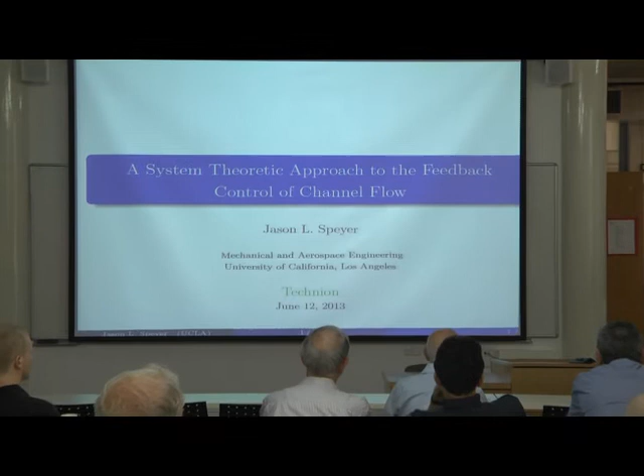So let me, with the few minutes that I have left, talk about a system theoretic approach to the control of channel flow. This is work that I did, a lot of it with John Kim, who's at UCLA, and others also at UCLA, including Arthur Orr and Luca Cortelezzi and Sun Kang, among others that have been involved with this over the years.

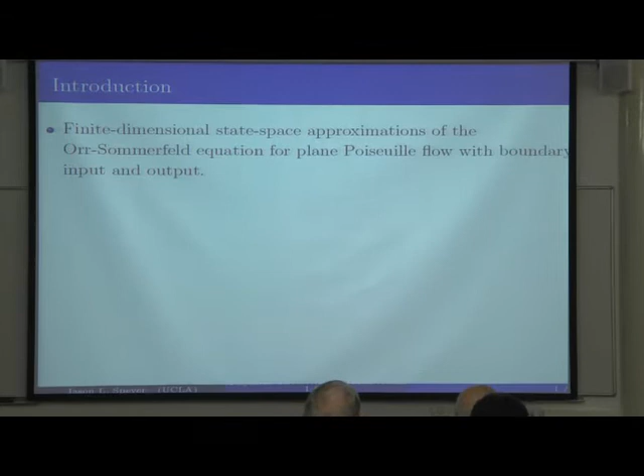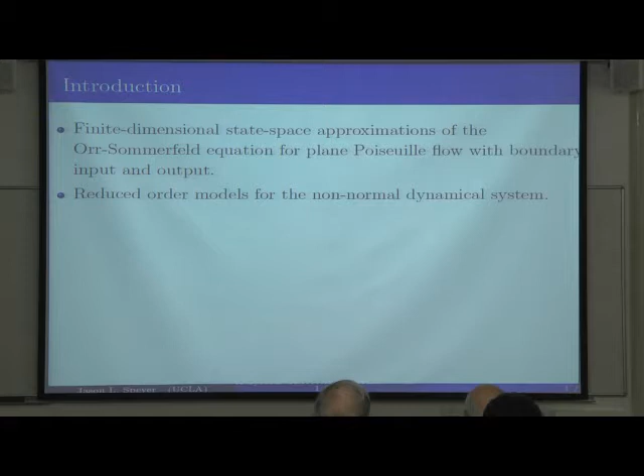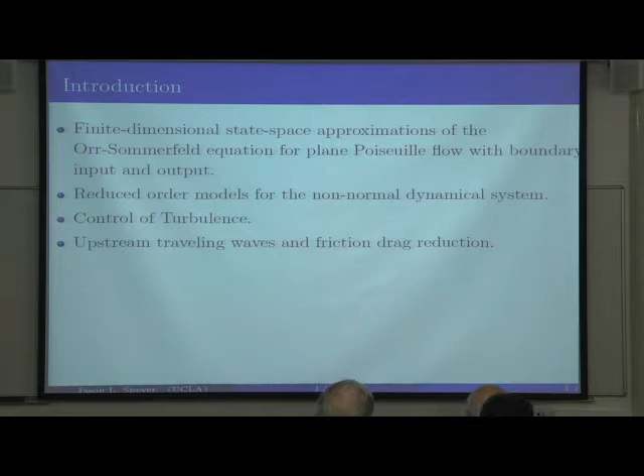This started actually with Sanjay Joshi, along with John Kim, on the idea of applying system theoretic ideas to flow control, basically feedback for these kinds of systems. I want to talk about finite state system approximations we started working with, in particular reduced order models for non-normal dynamical systems associated with the Navier-Stokes equations, then look at some things we did in the control of turbulence, and finally talk about upstream traveling waves and friction drag, and the fact that these lead to instabilities due to these upstream traveling waves. They lead to possibly periodic controllers and the little tricks we did to solve this class of problems.

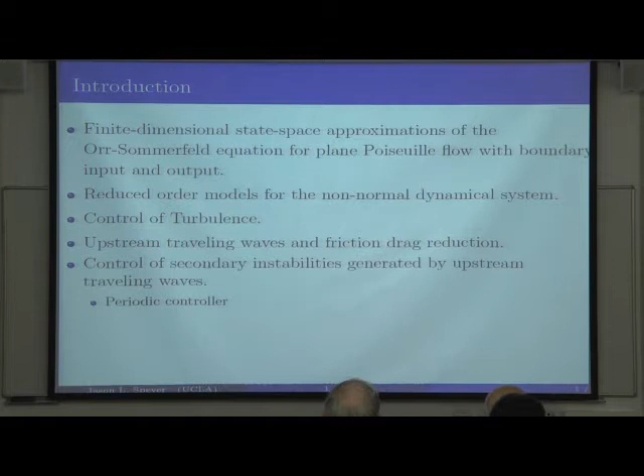From a controls point of view, this was insightful. Maybe from the fluids point of view, it seems somewhat mundane. So it just shows the variation between what one looks at and what one thinks is important and insightful.

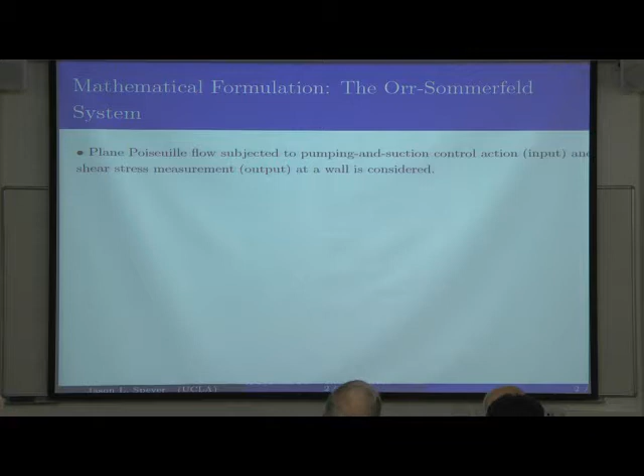Let me start out talking about the models we're using, which is basically Poiseuille flow, subject to pumping and suction as the control input, and shear stress measurements as the output at a wall. We're talking about flow, and we'll talk about it either in 2 dimensions or 3 dimensions. Here I'm going to talk about it in 2 dimensions, since it's simpler to describe.

We have a perturbation field V, made up of 3 directions: U streamwise, small v going span-wise, and W being vertical. One looks at a complex stream function in this form, where U is the partial of phi with respect to Z. Z goes along the height of the channel, and X is along the channel, so W is therefore the velocity perpendicular to the wall. These are the 2 velocities we're going to consider.

So we'll look at the partial differential equation for the Orr-Sommerfeld equations, which is basically this operator E operating on the partial of phi with respect to t, plus an operator on phi itself. This partial differential equation, at the wall at -1, at the vertical part of the wall, has the control U, which gives us this pumping action. Other than that, everything else is 0.

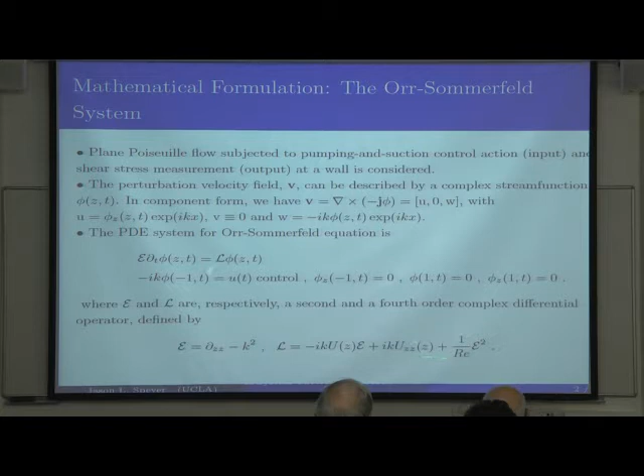So we have a zero slip condition along the wall. These particular operators, which you probably know well, are given by these partial derivatives with respect to Z. The K comes from assuming a Fourier decomposition of this partial differential equation associated with X that goes streamwise, and L is again this type of operator. This is the kind of thing we want to decompose.

So before we can do that, let me describe this as Poiseuille flow. This is the center, this is the velocity streamwise associated with the height.

So at Z equal to -1, this is 0, and then the center of velocity is at its greatest value when Z is equal to 0. And again, RE is the Reynolds number.

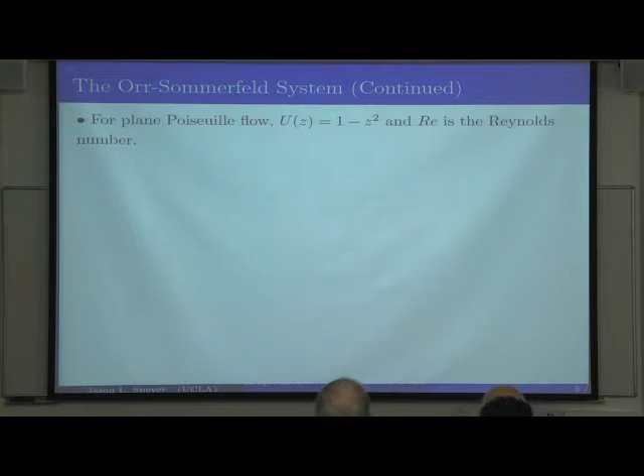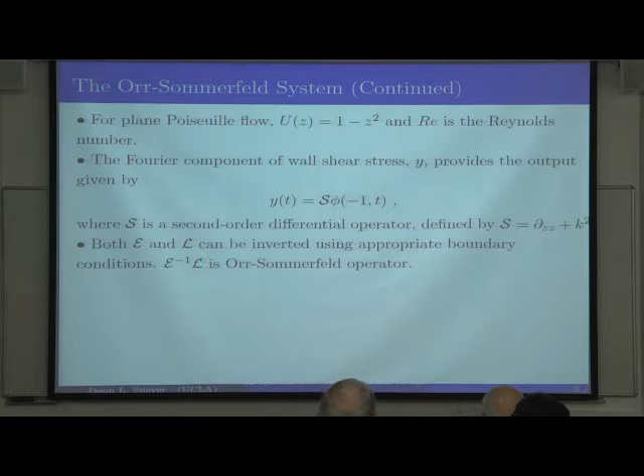The other part of this is that we're going to talk about shear stress, and shear stress is basically given along the wall, denoted by Y of t, and S is an operator operating on the stream function. So you can look at some of these operators as, in a sense, being invertible, and then you get a structure which basically can be decomposed.

And this is the decomposition that we're going to look at and basically focus on. So the notion here is that the stream function, which I've written only in terms of Z and T, is basically a sum of

independent or orthogonal functions. In this particular case, we usually use Chebyshev polynomials. It's not necessarily the only ones to use, but we've used those. But the other part is that the time behavior is captured by this coefficient.

And these coefficients are the ones that we look at in order to construct our state space models. So when you look at an element of the state vector x, it's going to be one of these. So this guy over here is for a particular wave number k, and it's the mth element of this particular sum, and all of these from 0 to m is going to form a state space.

So this is what we're going to use in order to construct our state space, and talk about an input-output relationship relating, for example, this is the output, and it's a function of t. This will be a state space associated with time, and then there'll be an input with respect to time. So these are the kinds of things that we're going to operate on.

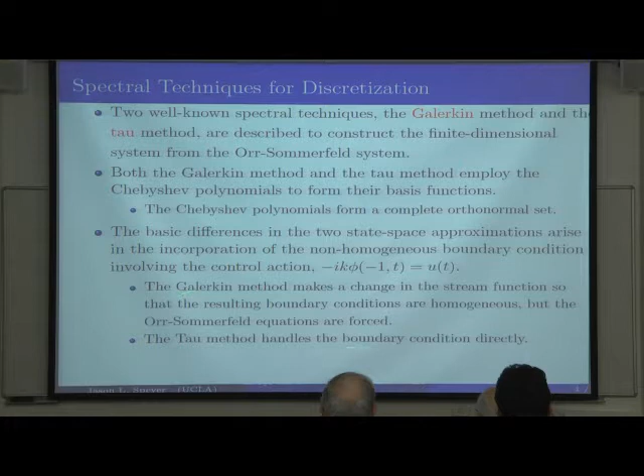In one case, you do it by redefining the stream function so that the boundary conditions are all 0, but the forcing term is in the partial differential equation. The other method handles it directly, which is the Tau method. So the Galerkin method makes the change in the stream function so that the boundary conditions are homogeneous, and the Tau method handles it directly. They should give the same answers, and we'll take a look at that.

So the idea of all this is first come up with a state space with a high order, then let's reduce the state space, see what that means in terms of what you lose when you have an input-output structure, and then use this in order to form controllers in order to reduce turbulence.

So the state space representation for this input-output structure, using these two spectral techniques, is going to give a structure that looks like this. So it's going to be an nth order. We're going to take these sums to infinity, but you've got to cut it off at a reasonable number. Sometimes this number is pretty big, so the state space is pretty large.

Here we have x, which is basically composed of all those coefficients, A that we were talking about, u is the input, y is the output, and it may have a direct throughput, D. And one of the things that might be a little disconcerting for some people is there's going to be complex matrices, like A will be a complex matrix, and here U will be a complex matrix.

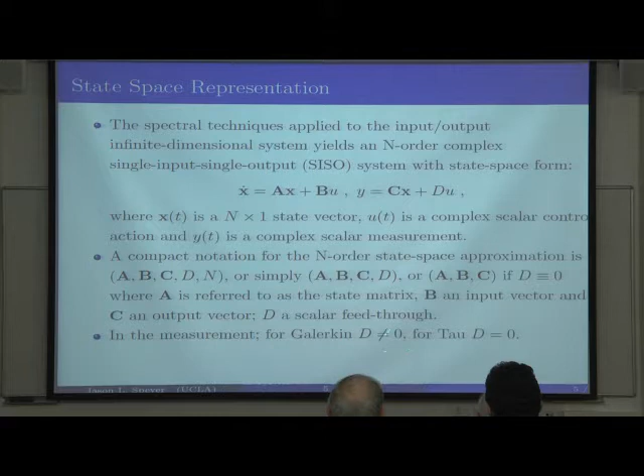This feed-through feature basically turns out to be unequal to 0 in the Galerkin method and equal to 0 in the Tau method. And so what is the relationship between the two?

It turns out that in the tau method, there are always two very fast eigenvalues. And if you allow that to go into steady state, then you basically recover the same D that you get in the Galerkin method.

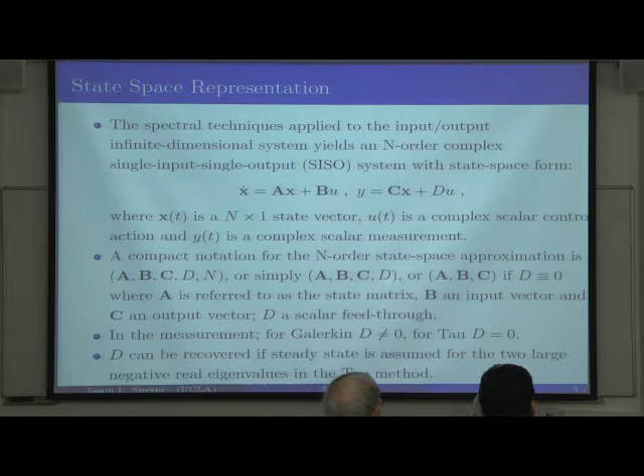So after doing all that, we looked at different stages of this work. What I want to do is look at metrics for these systems, because now we have a large dynamical system. Even though we've reduced it from being infinite to finite dimensional, it's still very big—some of these things may be 130 states, for example. What we want to do is create metrics so that when we reduce the structure from maybe 130 to about 20, what do you have left? What happens when you use reduced order models like balanced truncation on these kinds of structures?

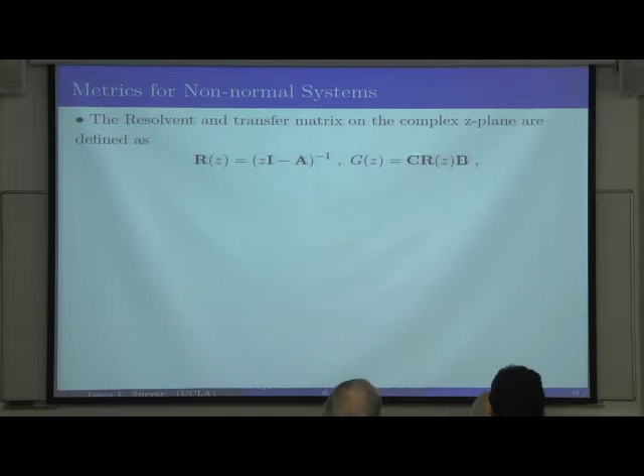So the first thing I want to do is talk about these metrics. The two of them are this resolvent, which is basically just looking at the effect of the inverse of Zi minus A, where Z is a complex number, or the transfer function, which uses Z but has an input-output structure associated with it, C being the output matrix, B being the input matrix. So one of the things we might look at is the norm of R of Z, abbreviated in this way, which is the largest singular value of R of Z.

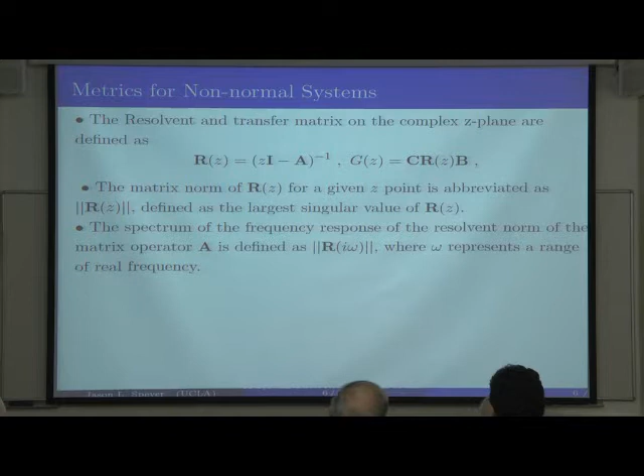And so we'll plot this sort of thing. We're going to look at, for example, the spectrum of the frequency response of the resolvent norm of the operator A, which is this. We're also going to look at the frequency response of G of Z, and make a comparison between these two, seeing what they look like for the full state problem and for the reduced state problem. Likewise, we're going to do that for the frequency response of G of Z, and also look at the pseudo spectrum.

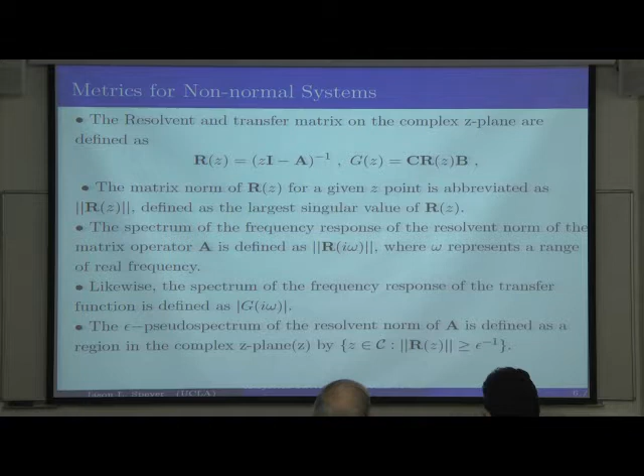Whoops, well that was fast, wasn't it? By looking at something of the sort—we're going to look at R for all values of Z in the complex plane, and we're going to look at contours of this function for various values of epsilon.

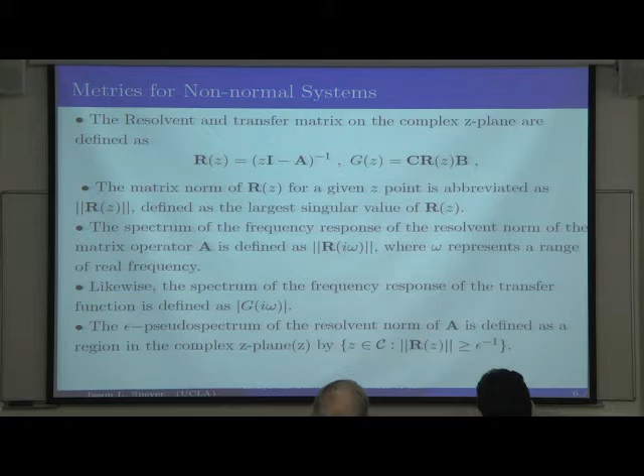So we're going to look at this because this pseudo spectrum is what a lot of people have looked at as one of the guides towards what creates turbulence. For example, it may be a stable system, but the transient response may throw it into nonlinear regions for which it now becomes turbulent flow. So that's one of the things we'll be looking at: what does feedback do to that underlying structure?

So let's take a look at reduced order models. The usual thing in the controls area is that you look at what's observable and what's controllable. So what we have here is a controllability Gramian, WC, and an observability Gramian, WO. The structures of these things tell us which is most observable. What we want to do is construct a system which is most observable and most controllable. You could have a system that's very controllable, but you can't see it, or a system that you can see very well, but you can't control it. So you want to balance those two things together.

And it turns out that there is a similarity transformation T, and S is the inverse of that, where you can decompose WC and decompose WO, the observability Gramian, which gives you a sigma—basically the singular values associated with both of these. These are ordered, so you've got one transformation which gives you an ordered set of singular values. These are called the Hankel singular values, and you order them in descending order.

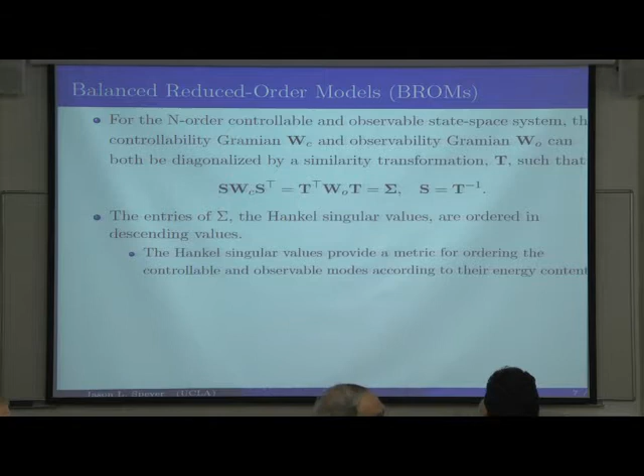And these Hankel singular values provide a metric for ordering the most controllable and observable modes according to their energy content. Jason, do they have to be identical values like that? Yeah, they are identical, within this transformation. And this is where you get balancing, because with this one transformation, you balance the most controllable and observable eigenvalues.

And then you use them by making the following reduced order system, so that NR is much less than the nth order. So what I've got here is an nth order system, and I'm throwing away a lot of these dynamics, where AR is given by this similarity transformation here.

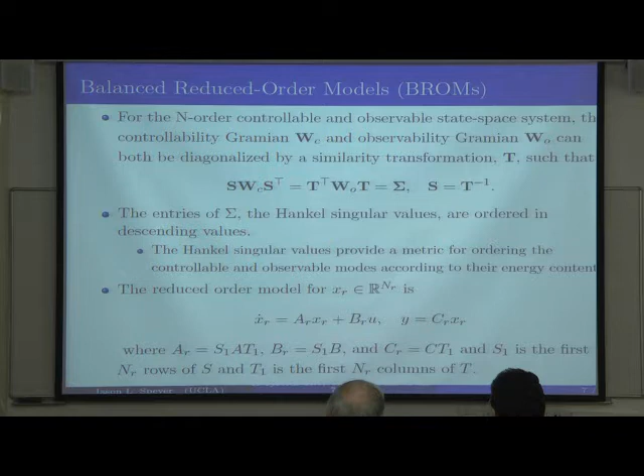S1 and T1 basically are the first Nr rows of S, or the columns associated with T, in order to make this transformation. So you might start out with 130 states, and this guy over here may have 20 or less. But they're balanced between the most observable and the most controllable structures using this particular transformation.

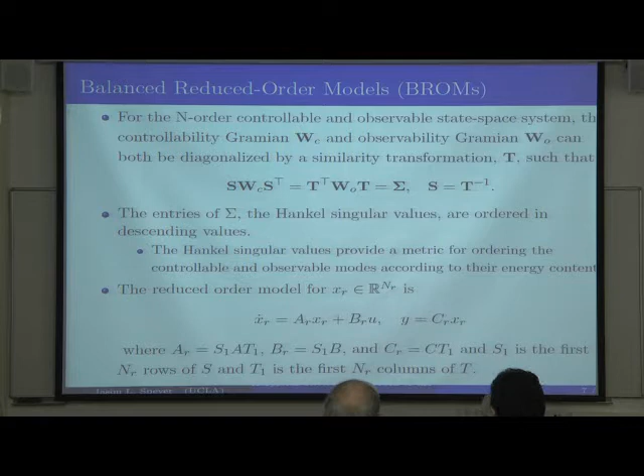Can you estimate how much energy is lost by this truncation? You can look at the errors associated with the truncation and get an idea of what you've lost by doing that. There's a norm associated with the structures. A guy called Enns basically showed what that value was. So you can bound it by a norm.

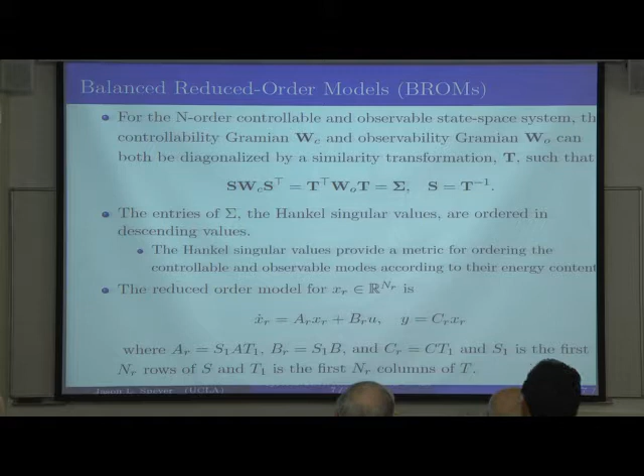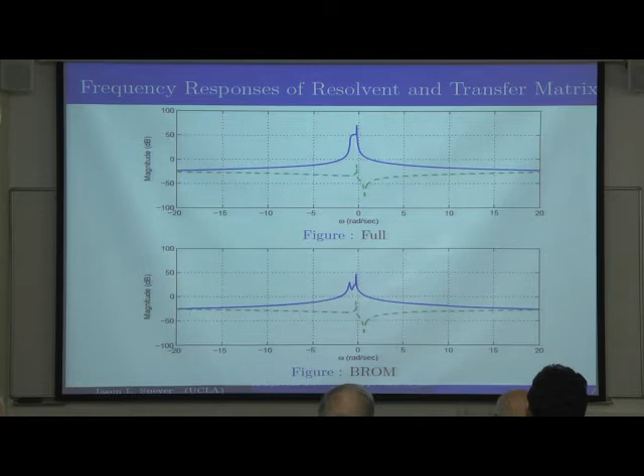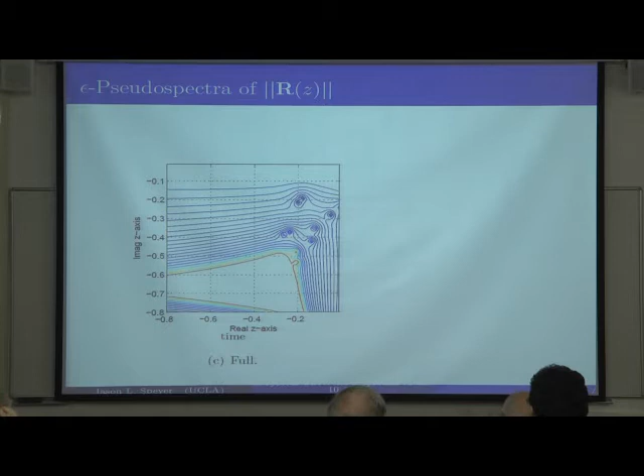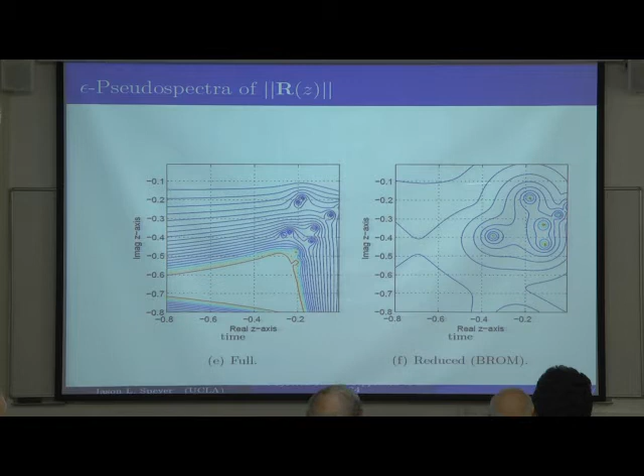The basic point I want to make is that when you reduce the system, you lose a lot of the structure that may be happening in the flow field, because you're only looking along the wall, and you're only able to control along the wall. So the input-output relationship really does make a significant difference in the possible capability of your controller. And that's what this is basically trying to tell us.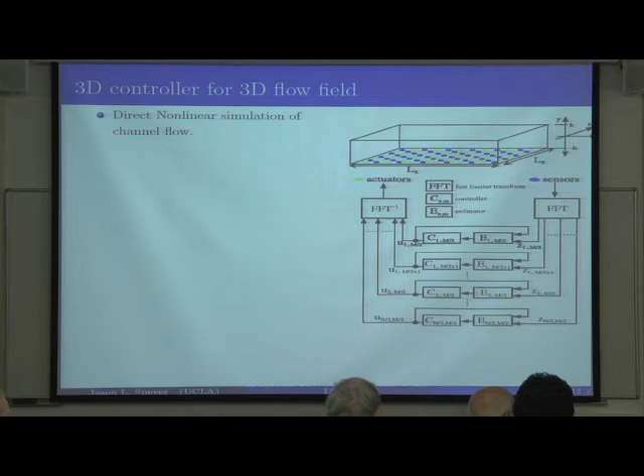So you have many sensors and many actuators. If you meant that, the fact is this could be a large number of structures. The question is, how do you reduce these? You want to reduce these in two different ways - how many of these do you actually need to control the fluid? And then there's the estimator and the controller over here, and you've got to make a whole bunch of all of these. That's an awful lot of states unless you do model reduction. So the kinds of notions of doing model reduction are embedded basically in the way we form these.

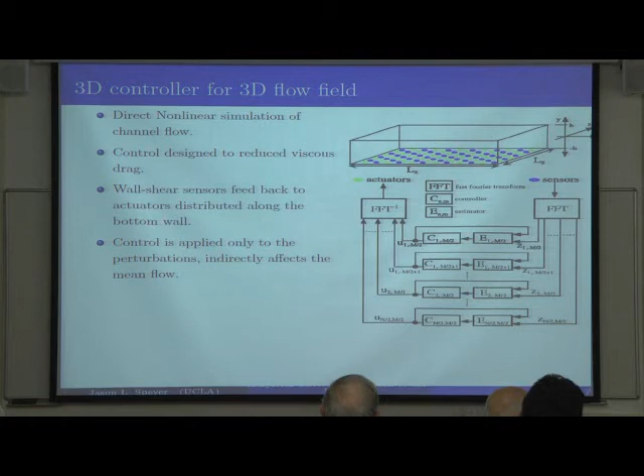Okay, so the control is designed to reduce viscous friction drag, and the wall shear sensors feedback to the actuators distributed along the bottom wall as I have here. The control is only applied to the perturbations, indirectly to the mean flow field, and basically it's sort of indirect to drag, the way this is. So what you want to do is control the fluctuations in every one of the wave numbers. Hopefully, if you do that, you will then get reduction in drag.

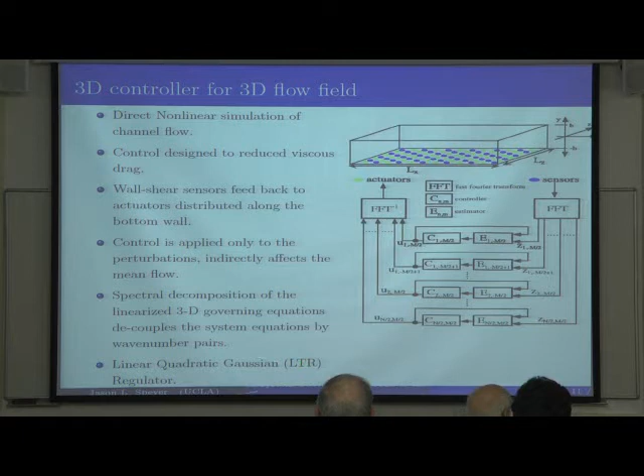So basically, what I'm saying is that the spectral decomposition allows us to break this thing into wave number pairs. The controller we used is the linear quadratic Gaussian controller with loop transfer recovery. It's probably well known, and we could use H infinity if we wanted to in this case.

That's a good question. It's not very large - maybe I would say most of this is about 5,000, based on the channel. What is the characteristic length that you use in that number? That I've forgotten what we use. Channel half-width. But the Reynolds numbers, I think, were about 5,000. I mean, you can't go any higher than 10,000 because this was all done in a nonlinear direct numerical simulation. The transition is completely different above 5,000 and below 5,000.

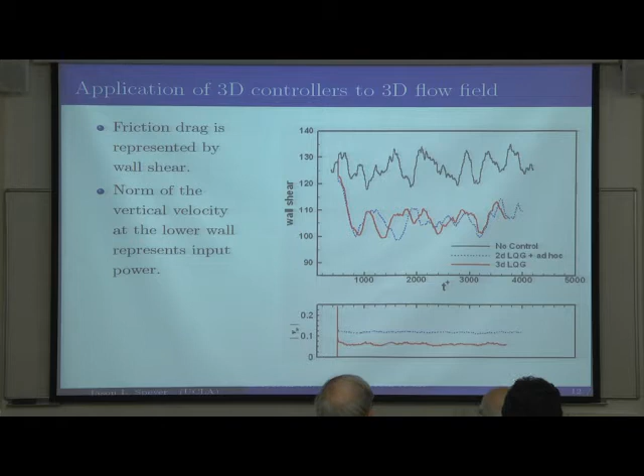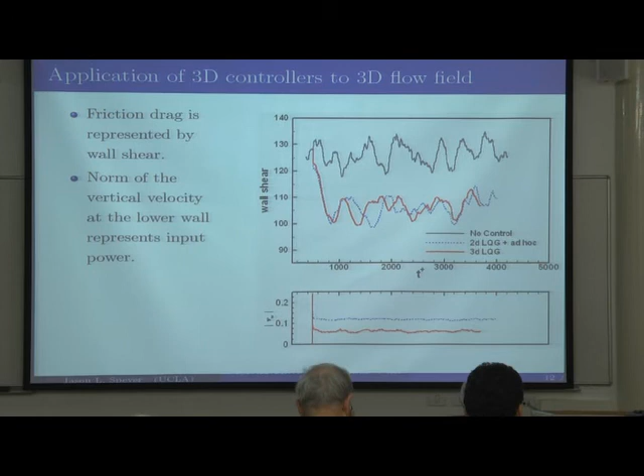Above it, small disturbances can be amplified by a linear process, and below that you need transient growth. I think this was below 5,000 Reynolds number. This flow field was already stimulated, but not by a small perturbation away from laminar flow—it was already developed, and this was the result. It was started way out, and then all of a sudden we turned the controller on about here, and this is what we got from the controller.

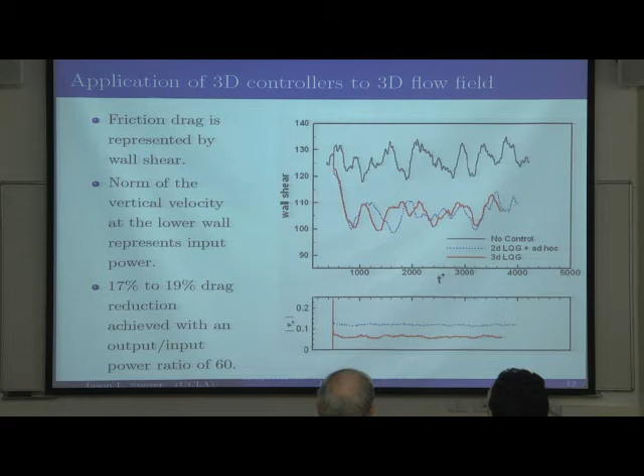Let me stop and tell you what this is. This blue line over here is VW, which is effectively the power associated with the norm—the power being used to control the flow. The blue one is twice as large as the red one associated with the three-dimensional flow, so we were doing better in the amount of power we were using. What we effectively got was somewhere between 17 and 19% drag reduction for that sort of thing.

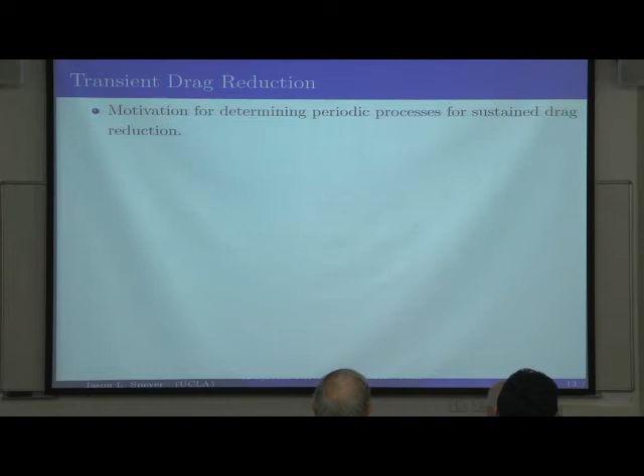Another place to look is that when we were getting these results, we started looking at the transient performance of these controllers. Basically the notion was the following.

In a two-dimensional flow, we got these huge transients well below laminar flow, and then they popped up like this. In three-dimensional flow, not quite as strong, but we got basically the same kind of dip in the drag, which gave us the notion that maybe one could have an oscillation associated with this, and sustain drag below the usual laminar flow field. So that was the idea, and that's the direction we started looking at.

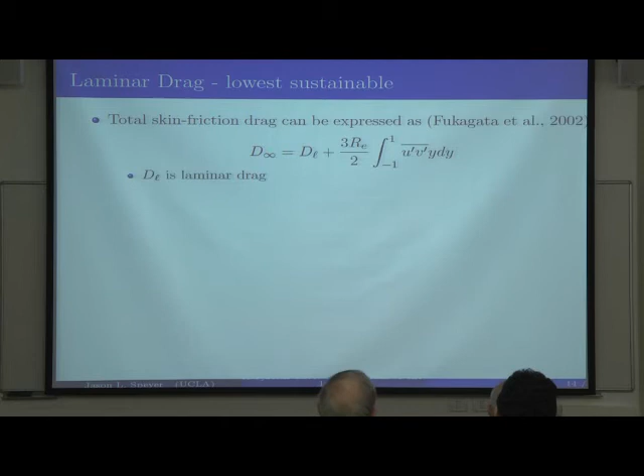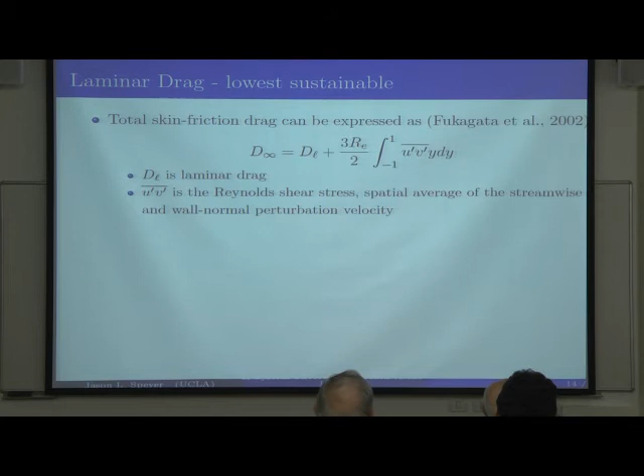But that was not particularly easy. It turned out we could look at some results associated with the total drag, where DL is the laminar drag, and this term is the Reynolds shear stress associated with the total drag. If we could make this piece negative, it may be that we could sustain a flow field below laminar drag.

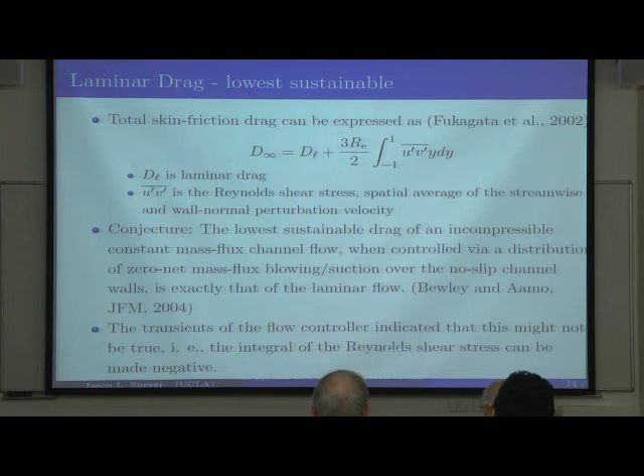The conjecture by Bewley was basically that this couldn't be done—you could not sustain drag below laminar flow—because he couldn't find an oscillation which would sustain it. But it turned out that the transients of the flow controller indicate that this may not be true, and the integral of the Reynolds shear stress may be made negative.

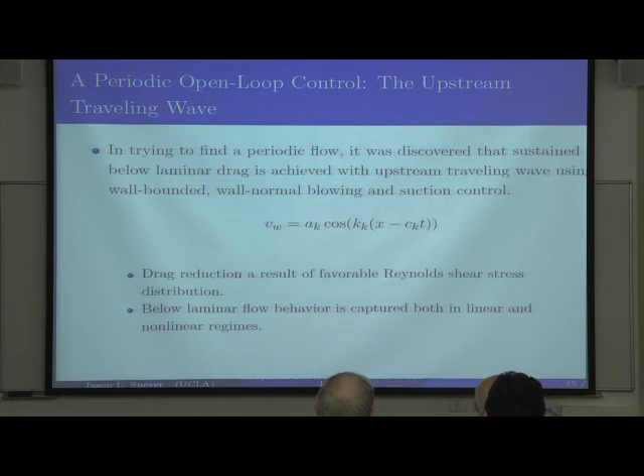The drag reduction did result in a favorable Reynolds shear stress, and below laminar flow, this behavior was captured in both linear and nonlinear regimes. The linear equations demonstrated this, which was interesting—we could talk about drag in a linear structure with this upstream traveling wave, and that's what we have basically shown here.

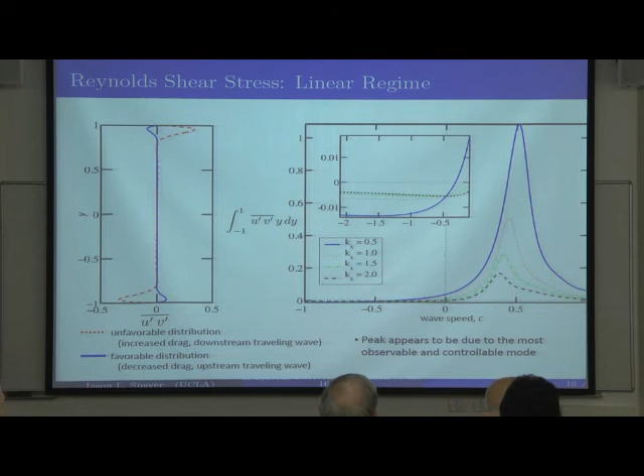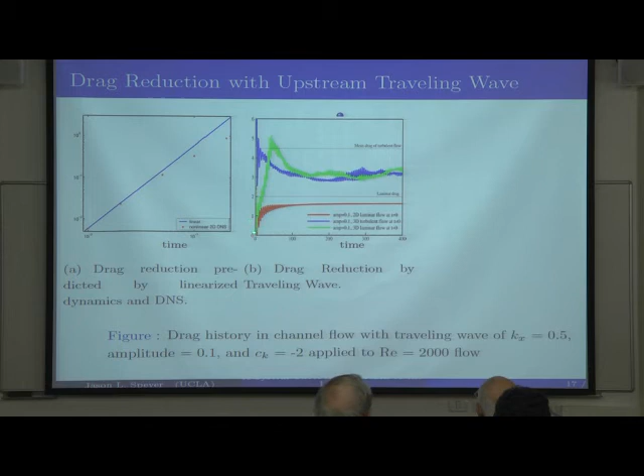Over here we have basically the 2D structure, which is nice and stable. But over here, and this is new, if we started it even here, but not with this, with a flow field that allows it to be largely perturbed away from the structure over here, you find that this actually pops up and then goes into the same structure as over here. So there's an equilibrium here, and there may be an unstable equilibrium over here. So you have two equilibriums associated with this structure.

This one is a turbulent layer, but what's interesting about it is just using an upstream traveling wave, you actually reduce drag in the turbulent flow field. So that's the basic point here: it's unstable away from this value, which is below laminar flow. It travels up, becomes turbulent, but far below the turbulent mean that you would get over here.

So this is the thing that we're going to focus on. In particular, what I want to finally focus on is the notion that if you start very close with a small perturbation away from the two-dimensional flow, it takes some time before you have an instability, but you do have an instability that brings this basically up into this structure, and I do have the Reynolds number over here.

Did you try to estimate how far it is in physical distance before it starts giving you this advantage? Say 300 in your time units, how much would that be in physical space and distance? How far down the channel would it go? I don't know, I don't remember any of the dimensions. That would say how many times you need to do it. You start your process, it takes some time for the drag to go down. 500 or so in your units, but the flow has moved forwards meanwhile. So how far is it?

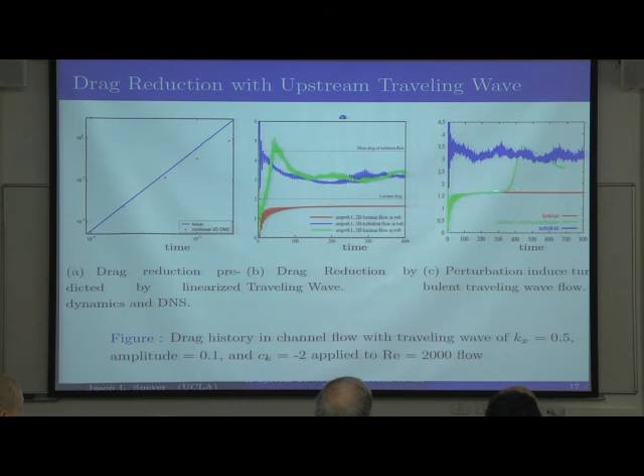The assumption is the traveling wave is almost in steady state all the way along this path. But it takes time, right? Yeah, it takes time, the traveling wave is operating all the time. I start out here with a small perturbation away from this point, and then it takes a certain amount of time. You're saying, well, how far, where did the instability basically occur along the channel? Yeah, but I don't know the answer to that.

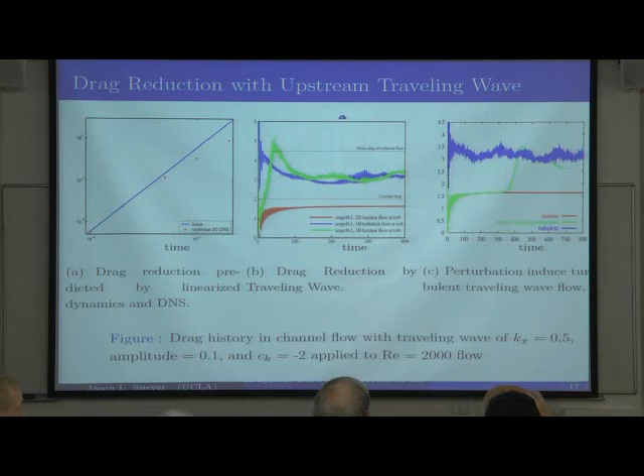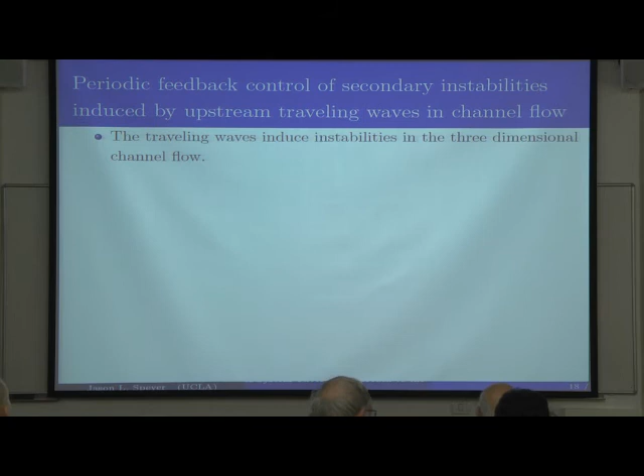So basically the idea is, what I want to do is talk about how do I control the periodic feedback control of these instabilities, and that's what I want to end up with. So the traveling wave induces these instabilities in the three-dimensional channel flow, and you can basically find these structures or these instabilities by using Floquet theory. But the trouble with Floquet theory is that you can't use it for control, unfortunately.

So these equations predict the introduction of these instabilities for small amplitude traveling waves, but they do not provide the proper framework for this. So the essential observation, which is maybe not a great one, is that the dynamics of the steady state flow induced by the traveling wave must be linearized and decomposed in a reference frame moving with the traveling wave. So that's what we do.

So the resulting equations are linear time invariant. What happens is if you're watching this thing in a static frame, it's oscillating up and down, so you need a periodic controller in order to do that, and those are very difficult to get to. But if you go along the traveling wave, you basically can then create a time invariant controller.

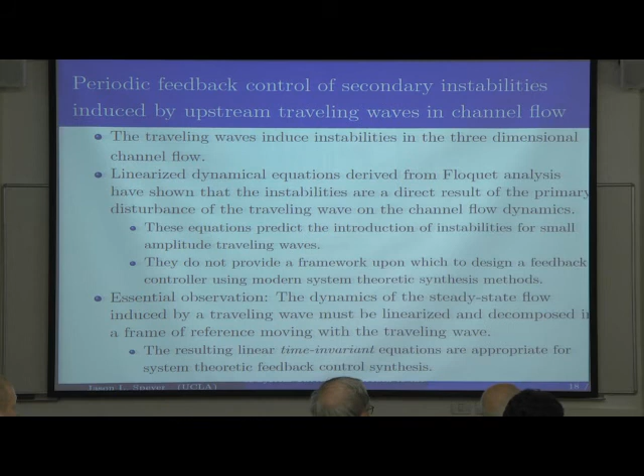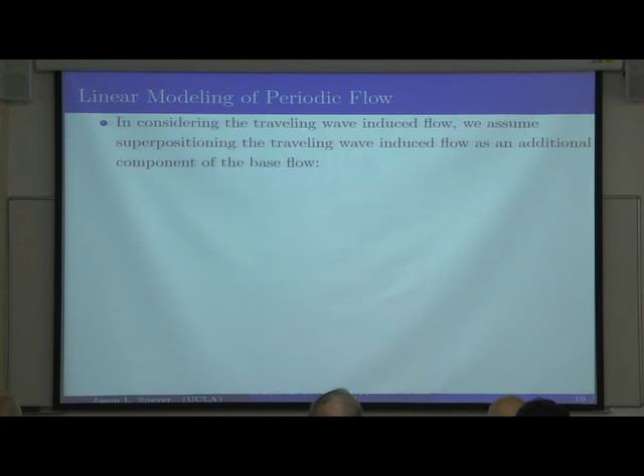That's the good news. But you still have, when you define the linearized equations, it turns out that the streamwise wave numbers are coupled. So you get a very large dynamical system that's associated with it, that you're stuck with no matter if it's in a moving frame or a static frame. So what we looked at is consider this traveling wave: we assume a superposition of the traveling wave flow on the base flow. So this thing looks like the following.

This is the base flow. This is the velocity due to the traveling wave, and this is a perturbation associated with it. So these are in three dimensions, and C indicates the traveling wave. All the velocities are normalized around the center line, and what we do is we get a traveling wave induced by this structure over here.

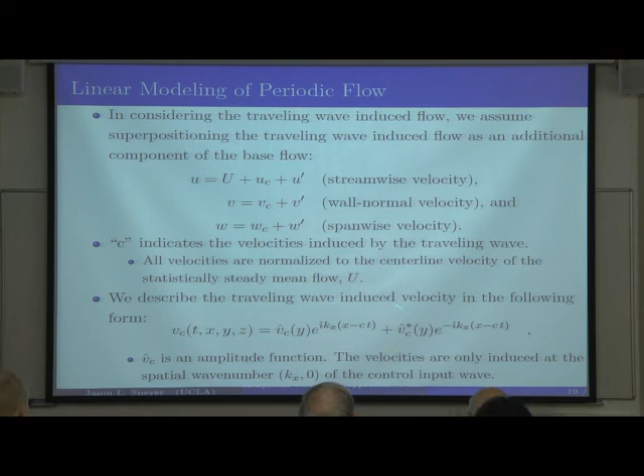So the question really is: how do I produce v c? The point is I get a structure like this by introducing the traveling wave into the linearized dynamics at each wave number pair. So you put a periodic structure into this linear system, and what you get is the same frequency out, but you get a phase and amplitude change. That's what this v hat and this v of y turns out to be. So that's how you get that kind of structure.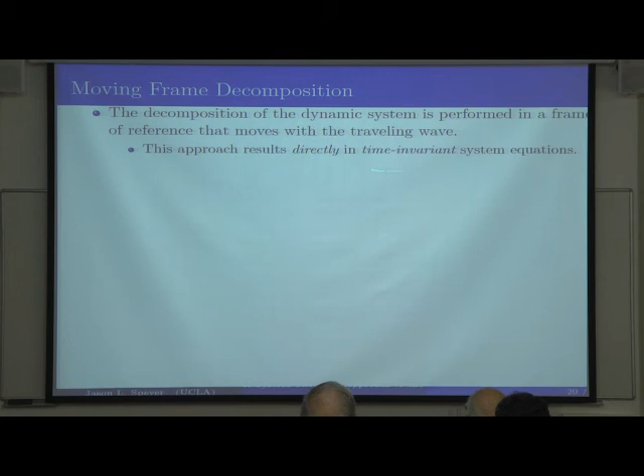The decomposition is performed in the moving frame, but this results in a time invariant system. The reason is because effectively you get rid of the time function by allowing x prime to equal x minus ct, so the traveling wave becomes expressed in the x prime direction in this particular form. So this becomes x prime rather than x minus ct, and that's the underlying structure that we take.

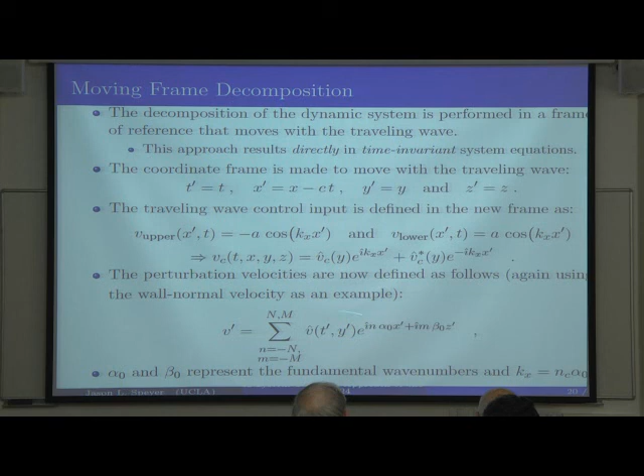So the basic point is what we want to find is not V — now we have VC, and we want to find what the perturbation is. The perturbation is associated with this spectral decomposition and V hat. V hat is going to be related to a sum of these coefficients in time, as we had before, using the Chebyshev polynomials.

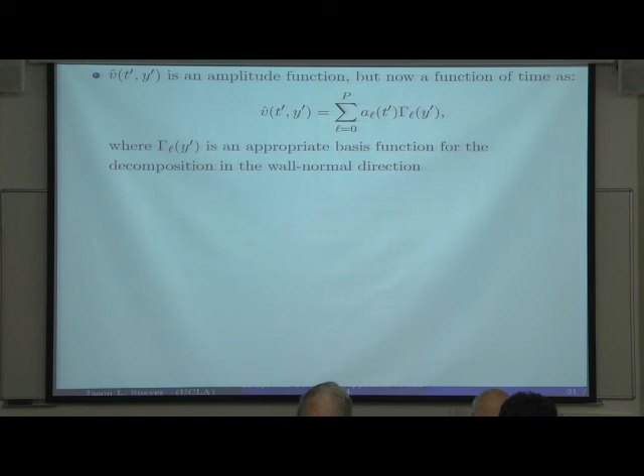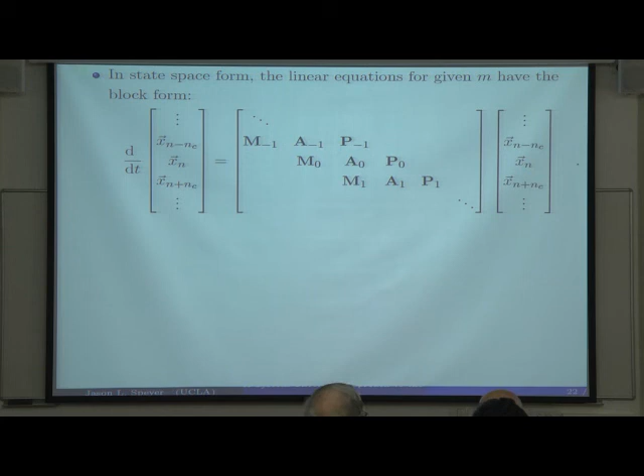And what we did is we cut it off at about 5. So the results I'll show are basically a dynamical structure where we have a single wave number associated with the span-wise direction, but 5 associated with the stream-wise directions. So that's what we're looking at here. The dynamical system is basically in the same form as before, but in this larger structure.

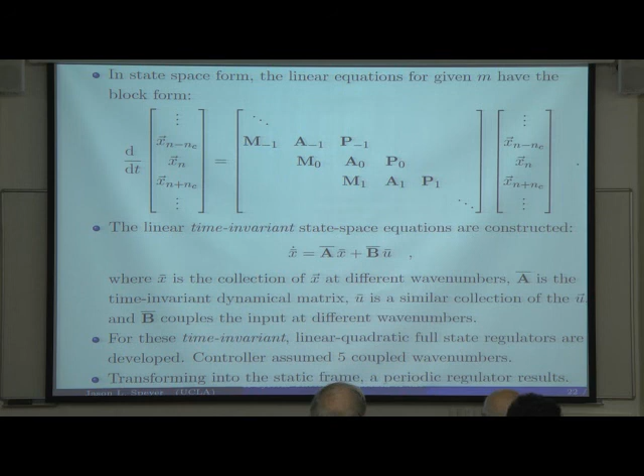For this time invariant system, we use a linear quadratic regulator, but you can imagine the number of states we had, so it was a little bit formidable. If you transform it into the static frame, you get a periodic regulator. So that was the nice feature of it.

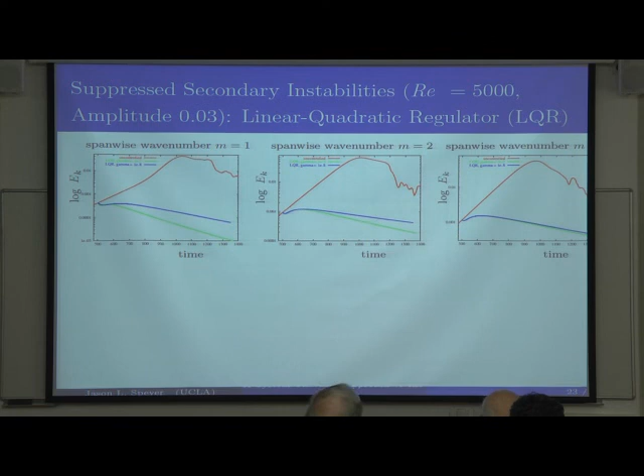So this is for a wave number m equal to 1. These are all span-wise wave numbers: m equal to 2, m equal to 3, m equal to 4, 5, and 6. So we stabilized this very complicated periodic system.

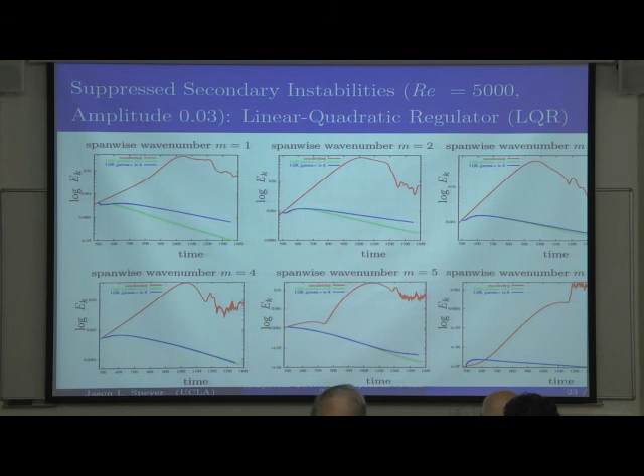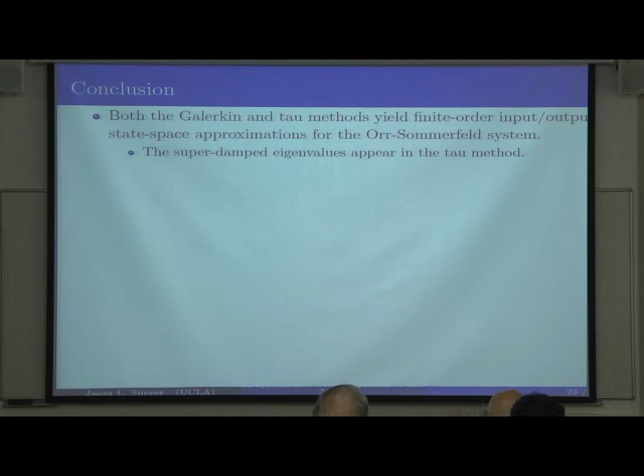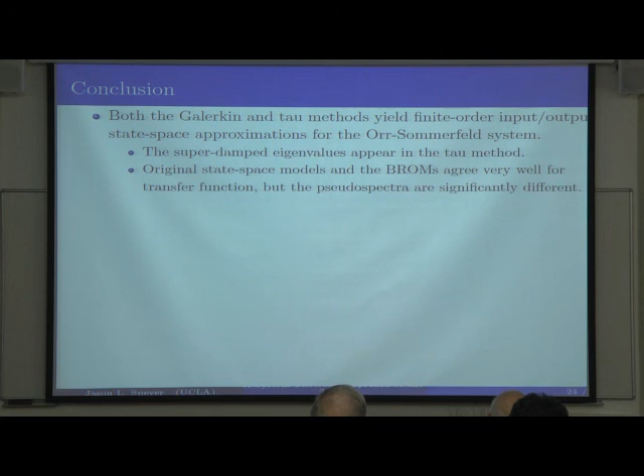So in conclusion, we looked at the Galerkin and Tau methods and found out they were essentially the same except for the super damped eigenvalues in the Tau method. We were able to reduce the order of these systems, and the transfer functions were similar, but the pseudospectrum changed dramatically. The low order LQG reduced things by about 17%. The upstream traveling wave reduced drag even further, but has secondary instabilities.

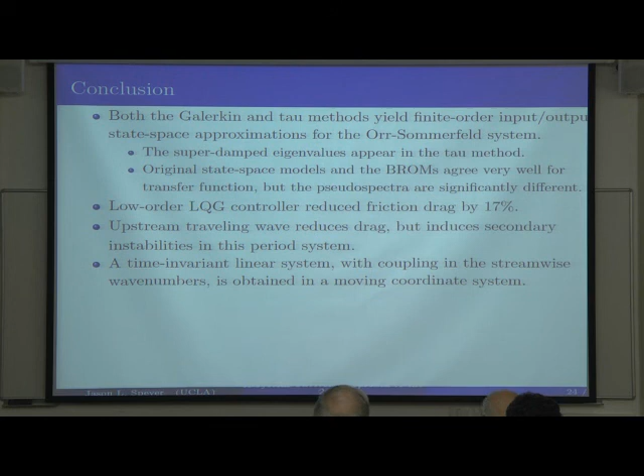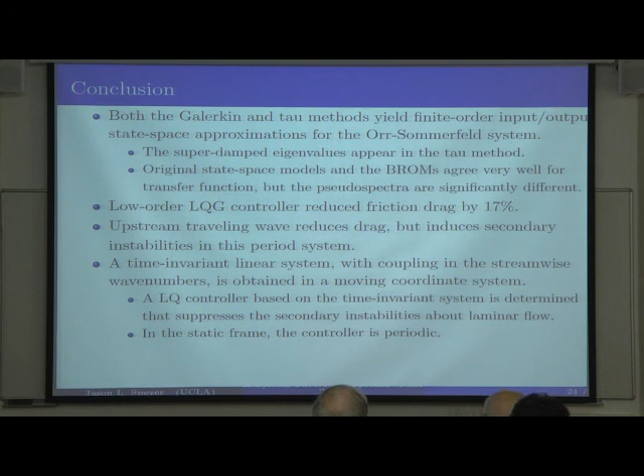A time invariant linear system was used, which is coupled, but it was time invariant if we were in a moving coordinate frame. The LQ controller based on the time invariant system was determined to suppress these things. And the bottom line of all of this is: in a static frame, it's a periodic controller. But the hope, which we never quite finished, is that a combination of traveling waves and associated controllers will eventually suppress turbulence. Thank you, I hope.